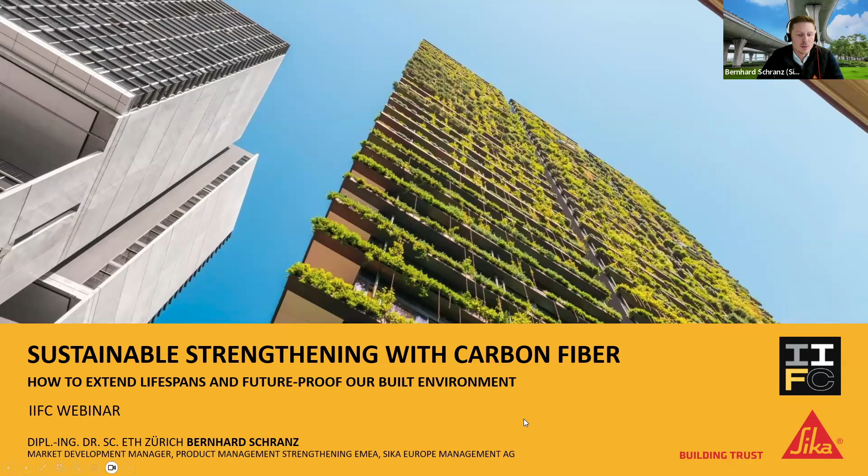I'm a structural engineer by training as well. I did my PhD in structural engineering in Zurich at EMPA and ETH in the field of structural strengthening. And I'm responsible at Sika for market development for infrastructure, Europe North, DACH, and Europe South, and also responsible for the product management of strengthening in the EMEA region.

Just very briefly, who we are. You might have heard of us as well. We're a multinational company in several business fields. We're 33,000 colleagues now in about 100 countries. We're producing in 400 factories, and we're quite proud that we have about 108 patents each year.

These are our business fields, and today we're going to talk about what we call engineered refurbishment. So we're talking about reducing CO2 impact of the built environment. And why is this important, or why is this becoming more of a pressing issue?

I'm sure everyone has their own answers for this as well, but here are some facts. Depending on the study that you read, most of them say something similar. About 20% of global CO2 emissions are caused actually by construction materials. And so we can track back 13% to the actual load-bearing structure. Most of the countries, including big corporates or small companies, have pledged to net zero by 2050. Then what makes everything more complicated is that 70%, when we talk about some of our biggest infrastructures, so bridges, 70% of those are already older than 50 years.

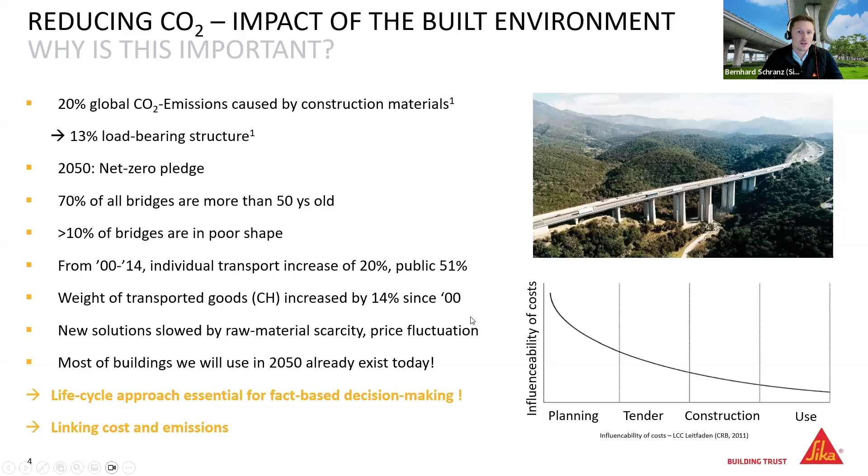Why is this especially important? Because considering this graph here, in the very, very early project phases, you can still influence your costs. But then when it comes to more concrete phases, or even the use, then you're stuck with all the costs that your structure, let's say, produces every year. And you can't influence it enough. So an early long-term view is very important.

So what are current strategies? Well, I've identified mainly three, which are: increase the lifespan of structures to reduce the CO2 impact, which can be done, of course, including the carbon fiber products that you're about to see; protect the structure against environmental influence, what we call the SikaGard range; and effective repair material uses for all circumstances, we call MonoTop.

Then using high performance materials at the right place instead of masses of low performance materials. They actually might have higher CO2 impact per kilogram, but when you check the whole structure and their effects of those materials, then you will find soon that this is very effective to reduce emissions. And this also includes high strength materials such as our ultra high performance concrete, the Sikacrete 920 UHP, it's called with us.

This graph here I found very interesting. It was conducted during a study at EPFL in Lausanne in Switzerland. So you basically have here the global warming potential in kilogram CO2 equivalent, and here the service duration. This is a bridge deck repair, let's say.

So in the beginning, you can do the bridge deck repair with standard concrete in black, or let's look at the green dashed line, with ultra high performance concrete. And you see they have a similar, or let's say the ultra high performance concrete has a higher CO2 impact in the beginning, but then every year when you have to replace the less performant material, the concrete, you increase the CO2 impact. And of course you can replace the y-axis here with cost as well, while the ultra high performance concrete stays virtually the same. So that means you might have higher CO2 impact maybe in the beginning, and cost, but in the long-term view, you will have much lower of both.

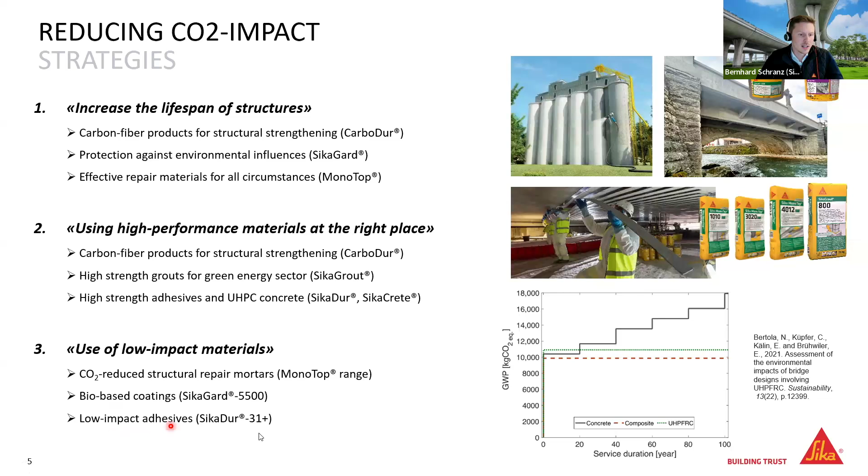Life cycle analysis in terms of cost and emissions is important, but how often is it really used at the moment? We conducted this study in Switzerland and found that in 9% of all construction projects we investigated, life cycle emissions were actually investigated. The unanswered responses we are almost certain are also a no, so in most cases they are not even looking at emissions in a life cycle approach.

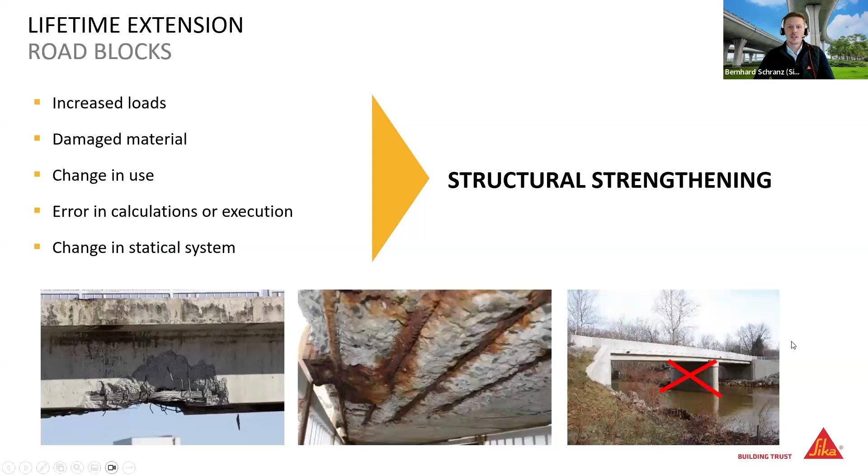Some more roadblocks you encounter with aging infrastructure: loads are increasing, you have damaged and deteriorated materials, changes in use, and oftentimes errors in calculations or execution, or changes to the statical system, like wanting to remove a center support. All this leads to structural strengthening being essential for lifetime extension.

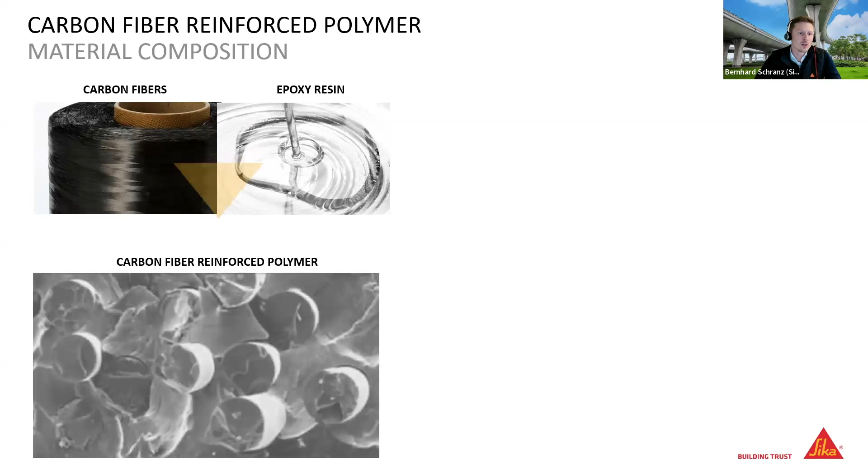Let's have a look at the solutions currently in the market. We believe carbon fiber is a highly effective solution. Basically, it's carbon fibers embedded in an epoxy matrix, which gives you carbon fiber reinforced polymer, CFRP. When you compare the carbon fibers to a hair, carbon fiber is much smaller, so in each CFRP plate you have thousands of those fibers.

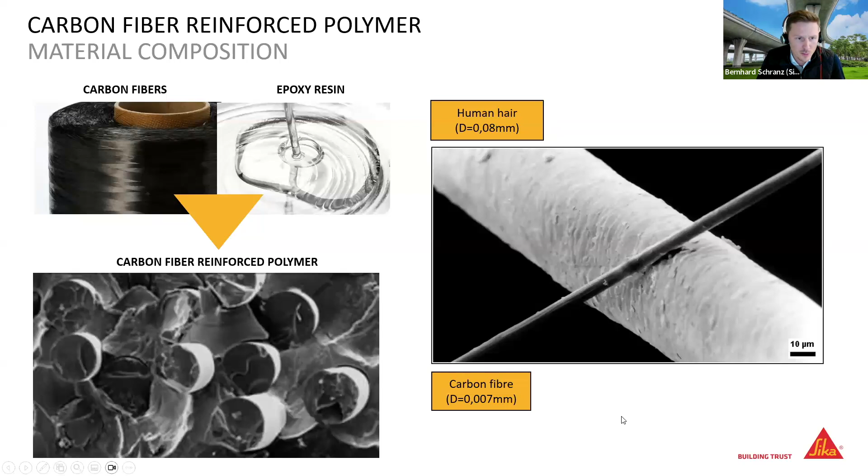You might know this material from different industries like high performance sports, motorsports, or even the aviation industry. We were among the first ones who brought this together with EMPA to the construction market. Material prices decreased, and with a lot of testing in the 80s, this eventually led to the first products and the first site applications.

The very first application was in 1991 on a pre-stressed concrete bridge. I recently checked, and the strips are still there. Also in 1992, it was used on a historical timber bridge. Here you can see what our commercials back then looked like.

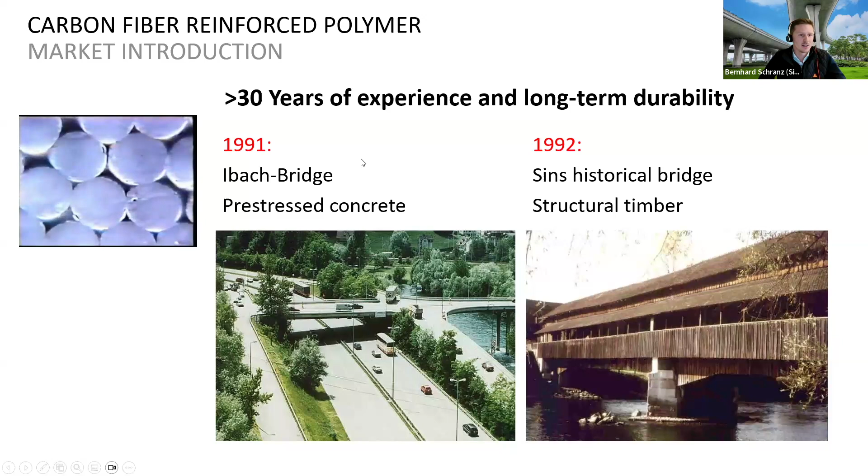So why do we trust in carbon fiber? At the moment it's already widely adopted in all sorts of international standards, which is a sign from the standardization side of wide adoption. It has very high tensile strength, it does not corrode so it's highly durable, you can roll it up to lengths of about 200 meters, and in the end you get very small cross sections for strengthening.

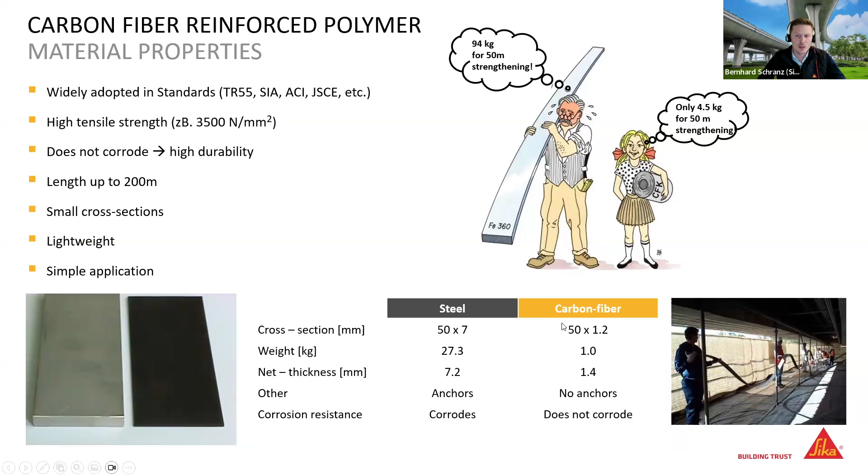It's very lightweight and also very simple. If you compare, for instance, the equivalent steel to carbon fiber, it's several times smaller if you make a strengthening solution with carbon fiber.

Going through the standard solutions available at the moment: what you will usually use is CFRP plates that come on a roll. These are fabricated in the factory, and you have all sorts of stiffnesses usually available and different cross sections as well, which you define depending on the load and surface needs that you have.

Usually you bond them externally, like you see here on that bridge, or you can also have them in a near surface mounted configuration, where you have a smaller cross section that you embed in a groove.

What you can also do is pre-stress them. In some cases with very high demands, you can post-tension them, which also increases serviceability considerably and lets you utilize the material even higher. They're usually glued to the surface with an epoxy resin, which we call Sikadur 30.

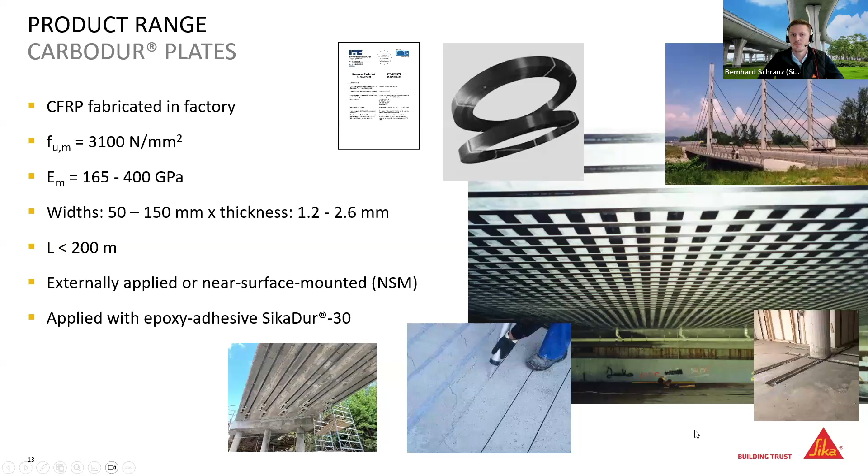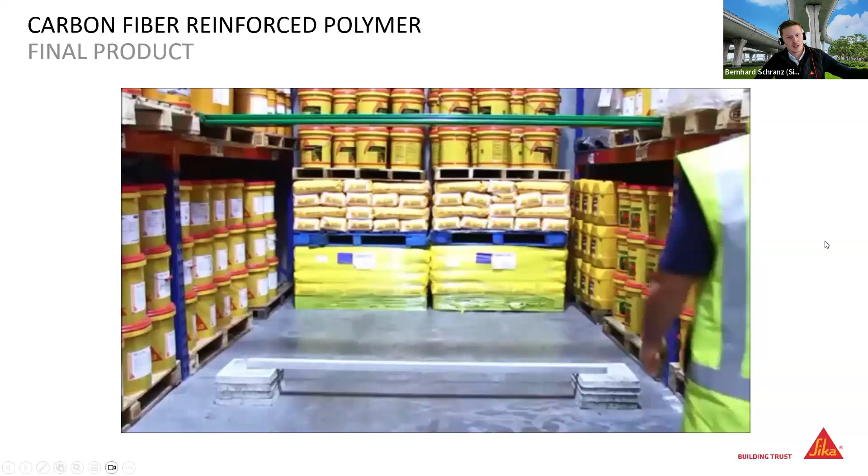So here it's not a very scientific test, but very nice to look at. We had two concrete beams, one unreinforced and one reinforced with a carbon fiber strip, and then both beams were loaded. This is the unreinforced beam, and as expected, it cracked and immediately failed.

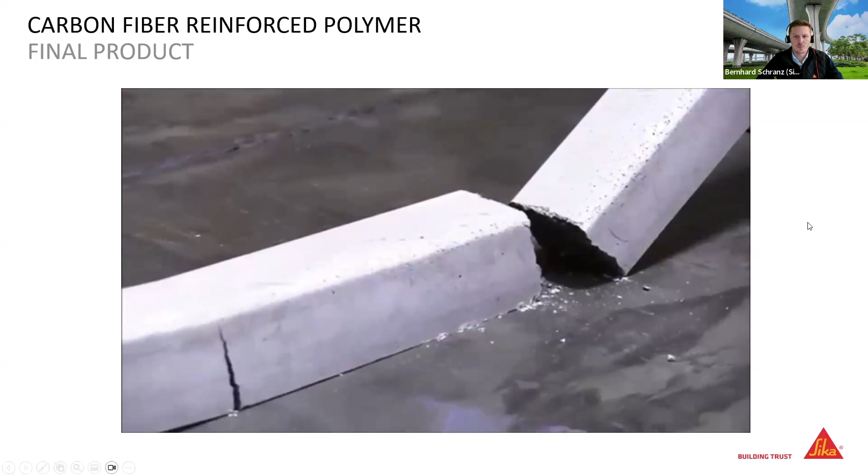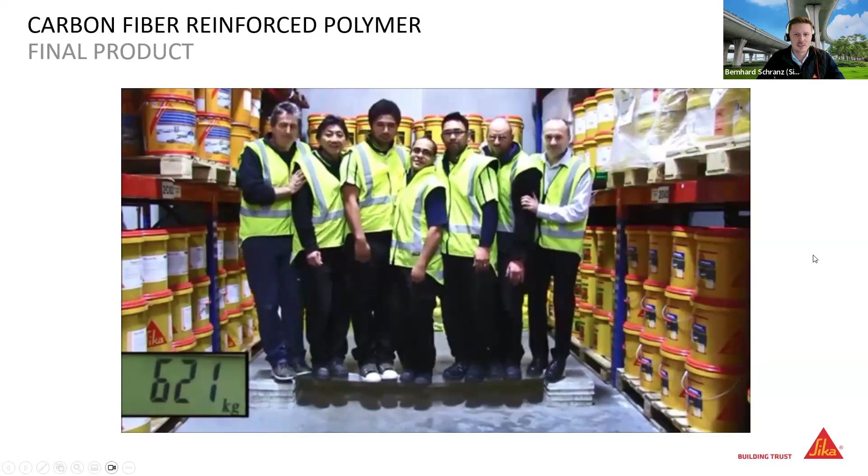Then we tested the strengthened beam, and it did not only hold the first load, but also even more loads. We had a lot of colleagues coming from the offices to stand on the new beam. And it's not only static loading, but we had them do a little bit of sports, dynamically loading this little beam. So it's a nice demonstration of how the material increases the structural performance.

Then next to the plates, we also have the fabrics, and the fabrics are usually CFRP. The reinforced polymer is created on site. That means you take the fibers as a sheet, apply them together with epoxy onto the structure, and then the CFRP is created.

Material parameters are a little bit different, also the stiffness - you will find all this info in the data sheet. Usually we have widths of 300 to 600 millimeters, and these are usually the roll lengths.

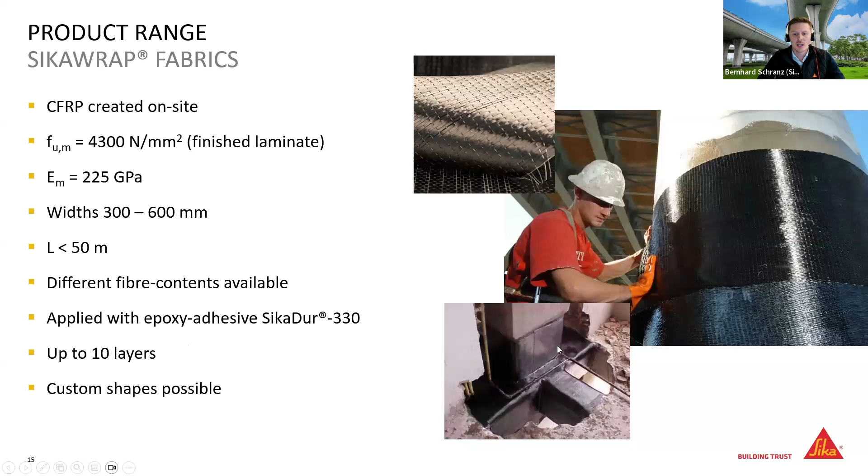We also have different fiber contents depending on the structural needs and the loading. This is the epoxy that you need with this material - it's a little bit less filled, or lower viscosity, so it nicely penetrates through the mesh. Up to 10 layers, depending on the structural applications, can be used, and of course custom shapes are also possible.

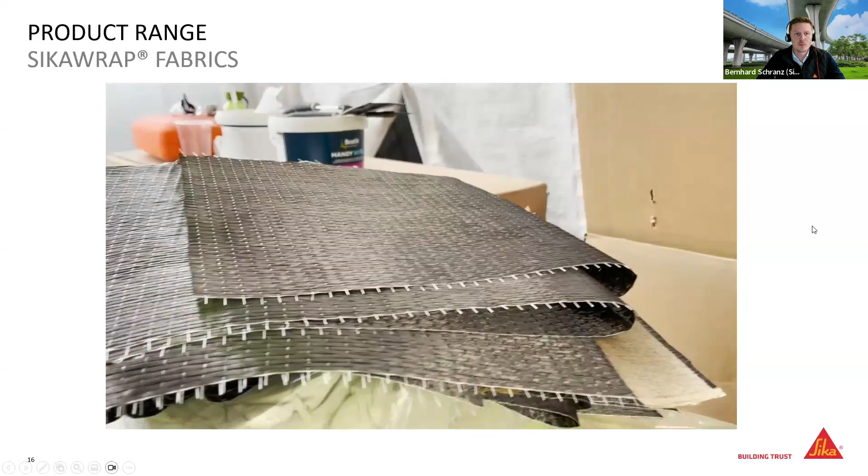This was a nice site example from Sweden. It was an old train repair shop, near demolition as you could imagine. Then the whole roof was strengthened with fabrics. Quite the effort, but in the end they could maintain the structure, so you could imagine the CO2 impact that was avoided against the option that the whole building would have been newly built.

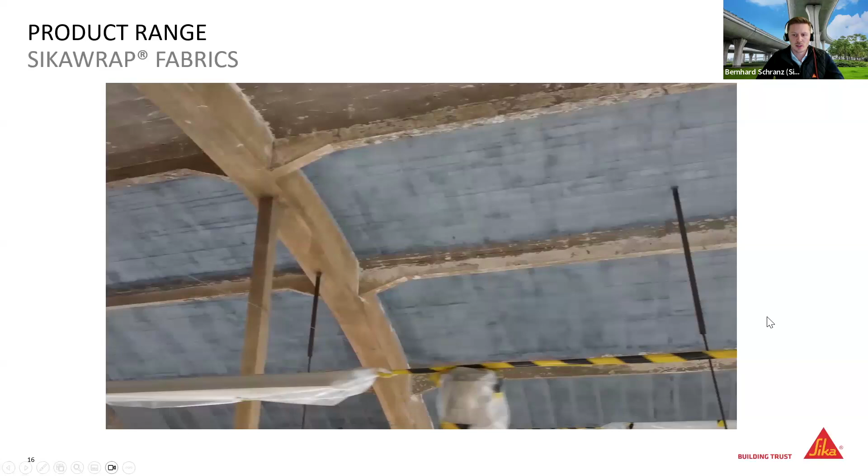What else is there? We also have prefabricated angles, post-installed anchors, and stirrups, in case you have less shear capacity.

And what we've been using for a long time is what we call the FX50. It's a carbon fiber strand that you can use for force transfer between all sorts of elements. When you cannot have the rigidity of the angles, plates, or fabrics, you can use this strand to create anchors, for instance under the CFRP angles or under the fabrics, to really put the forces into the compressive zone, or close the shear strengthening on top.

As you can see here, this was actually a shear strengthening done only with this material.

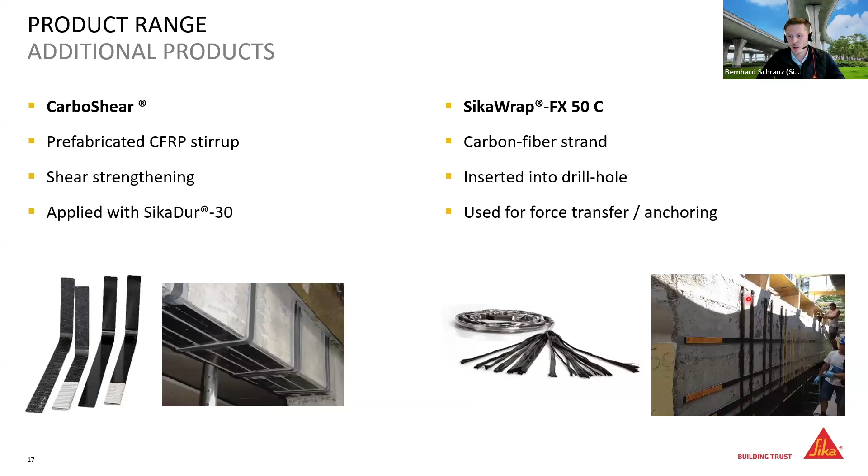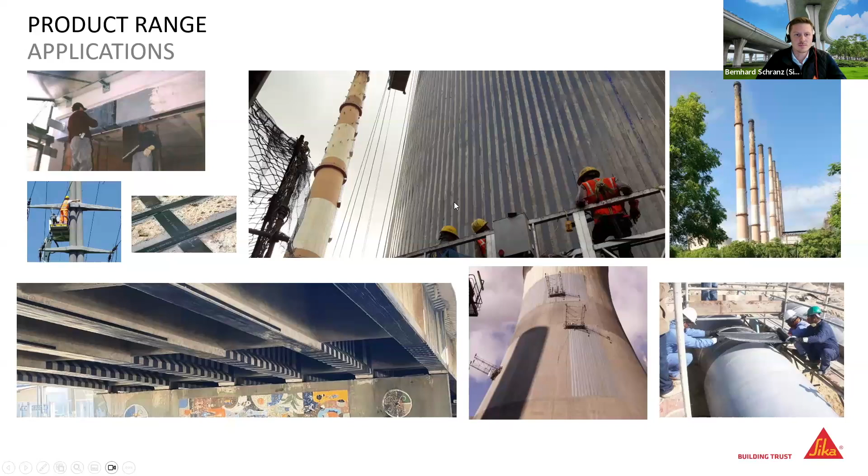Some further applications: standard shear strengthening, crossings of plates, very impressive applications on cooling towers and chimneys. And since we're also active in the Middle East, this was a pipeline strengthening - so all sorts of applications are possible.

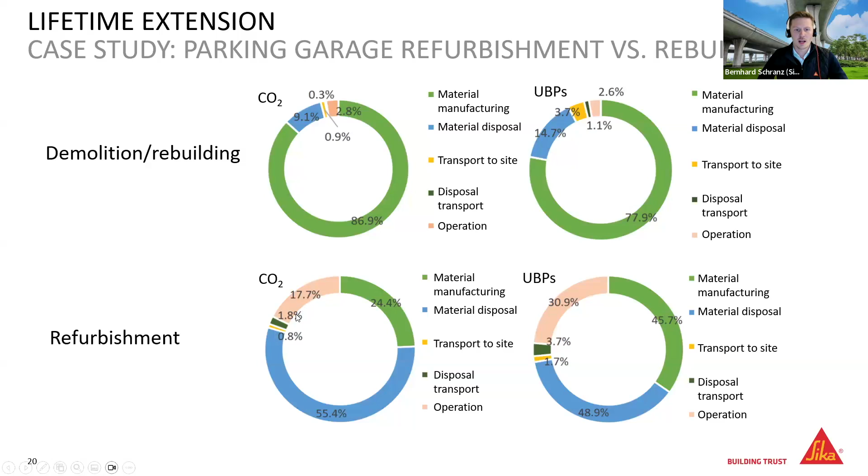When you go to refurbishment, it looks a bit different because you use a lot less material. The material disposal becomes more significant because you also dispose of the entire building at the end, and then the operational phase gets more important.

When we now look at total emissions and total cost, you see that rebuilding has much, much higher CO2 impact than refurbishment. And also what was interesting in terms of cost, the refurbishment was the better option.

Because most building owners, when you completely refurbish a building, like the city of Zurich, you can assign the initial lifetime to a totally refurbished building, and this is why refurbishment has a much nicer, much better cost footprint, let's say.

And this is even without considering operational hindrance cost. It means when they have to demolish the complete parking garage and they don't have any revenue from that for years, in comparison to when you have an intelligent refurbishment concept and can keep some of the structure still in operation. This comes on top, so the delta between those two will be much bigger.

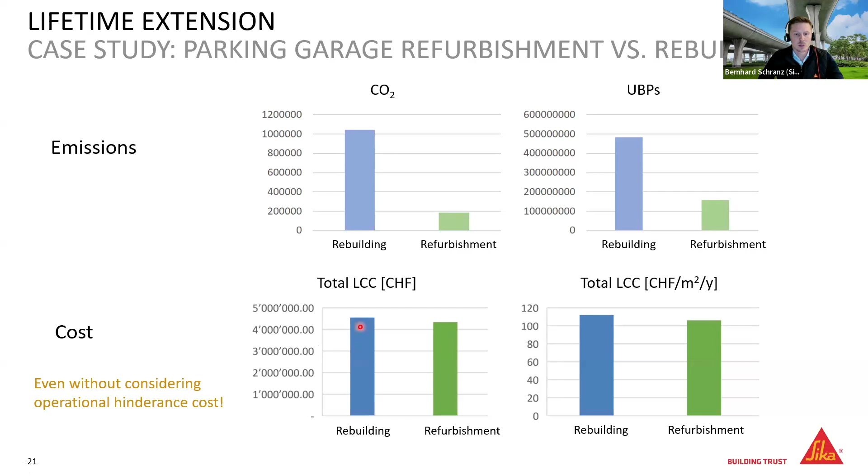So then we thought, okay, how about our materials? Can they actually last so long? Because we were involved from the beginning, we found very old projects where some of the materials were used. Here you see a road bridge, Oberriet-Meiningen, between Austria and Switzerland, where it was strengthened in 1996, and last year EMPA took some photos. Thank you very much to our colleague Safiris at EMPA. And the Carbodur really, the CFRP really works - this was based on visual inspection, of course.

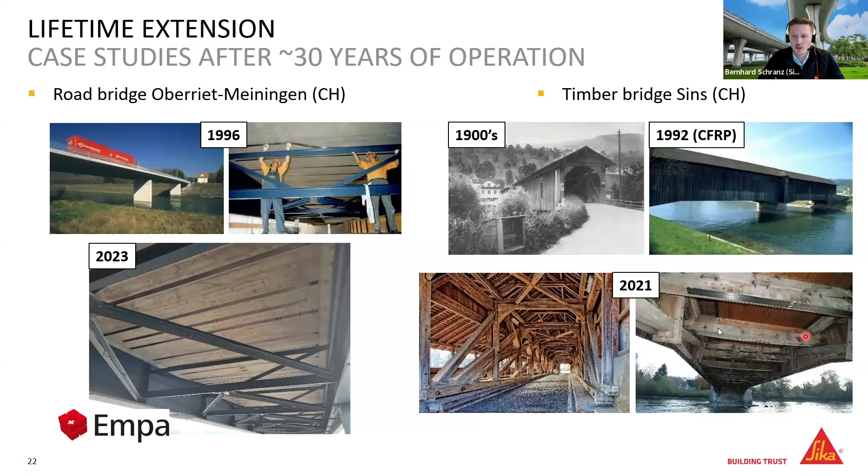We're currently working on also finding out the real material properties. And then here you have the timber bridge Sins from the beginning, which is actually very, very old, much older than the 1900s. But it was strengthened in 1992, and here also the CFRP strips really look great.

So what are the key takeaways from this? The pressure for lifetime extension is really increasing due to several external factors. Life cycle approach is essential, but it's not widely adopted still. Refurbishment can really have lower cost and emissions than complete demolition and rebuilding.

Decreasing maintenance cycles decrease emissions and cost, and this has to be checked for which materials are really used there. Please use highly durable, high performance materials because it will have a big effect on the life cycle performance. Also use CO2 reduced materials if you have to use a lot of them. And of course, use CFRP materials to enable sustainable lifetime extension.

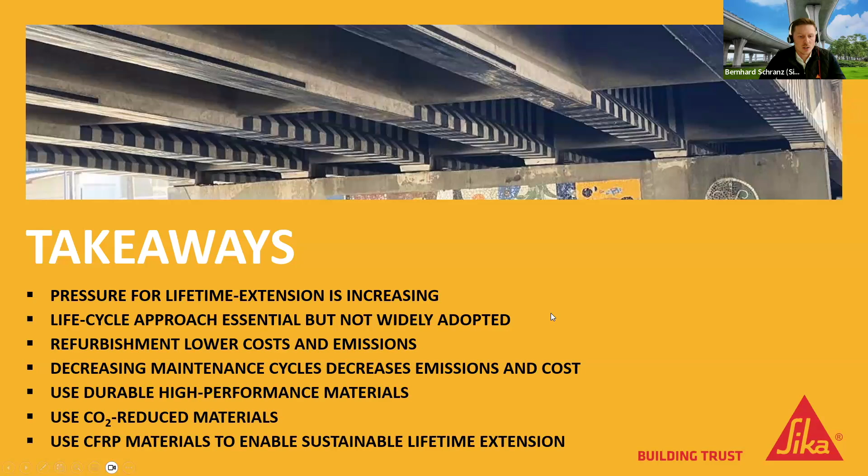And with that, I would like to thank you very much for your attention and hand over to my colleague Antonino Montalbano. I think Senna will do the questions afterwards, or? Yes, it's better at the end of all the presentations. Oh, okay, thank you, Bernhard.

I will take over. Just please confirm that you can see my screen. Yes. Yes. Okay. So my name is Antonino Montalbano. I'm a structural engineer, I'm from Italy, and currently I'm in charge, I'm responsible for the structural strengthening solutions for the SIKA group.

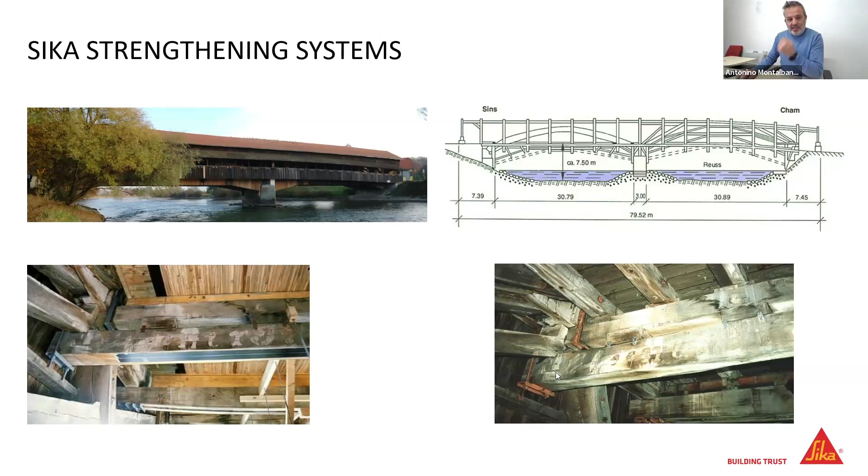I will go very fast with the first slides because Bernhard already showed you something about and mentioned the Sins bridge - it is one of the first ever applications in SIKA, and I will go fast also on this because Bernhard showed what is our current product range that covers all the needs with several products and solutions. I would add something related to some special applications that can be useful and can help find a suitable solution in some conditions where the classic FRP systems cannot be used.

I'm referring to what internationally is called FRCM systems, or sometimes TRM systems. So basically, all the systems that Bernhard, in the presentation before me, showed are FRP, where FRP stands for fiber reinforced polymer, and are composite systems that use as a matrix an organic matrix, normally epoxy based.

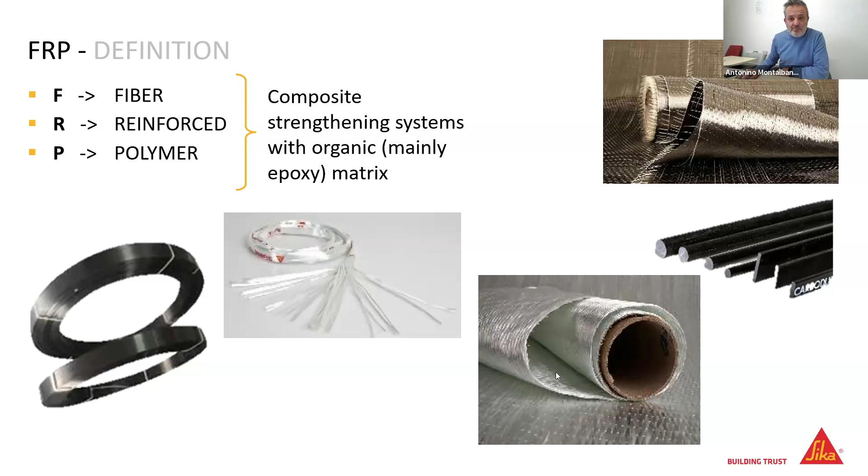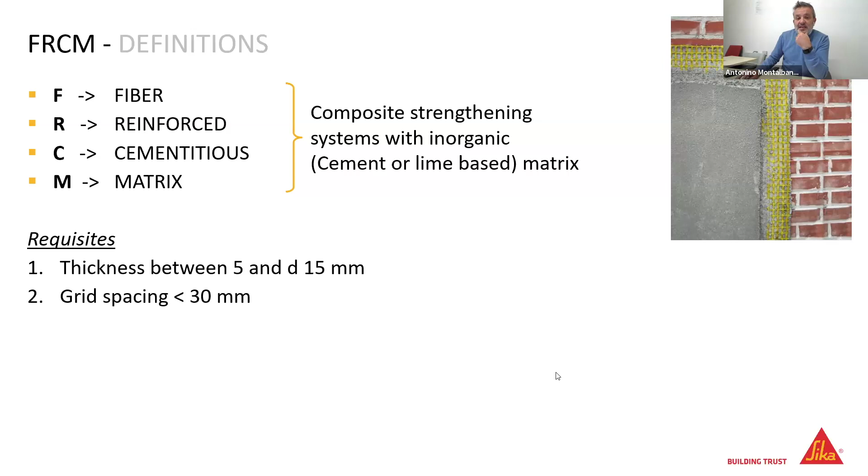I will give you a quick overview on the FRCM, where the concept is the same: a composite material, but instead of using an organic matrix, we use an inorganic matrix that can be cement or lime-based. The systems are thicker than classic FRP, with thickness between 5 and 15 millimeters, normally using glass fiber, carbon fiber, or sometimes basalt fibers with a spacing lower than 30 millimeters, so we use dense grids.

The advantage of these systems is that we need less surface preparation in terms of smoothness. We still need a clean, dust-free surface, but since we are using a slightly thicker system, we can have a less smooth surface and it will be okay.

One of the main advantages of this system is that, using an inorganic matrix, these systems can be applicable on humid substrates. So if you imagine a humid substrate, like when we work in a water tank or a buried structure, the application of classic FRP and epoxy resin is still possible, but needs special applications. These systems don't go in direct competition with classic FRP, but allow us to work in special application or service conditions.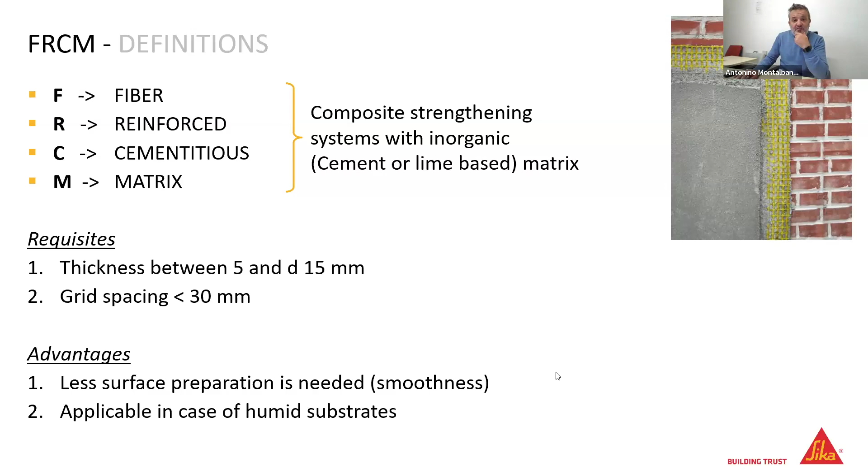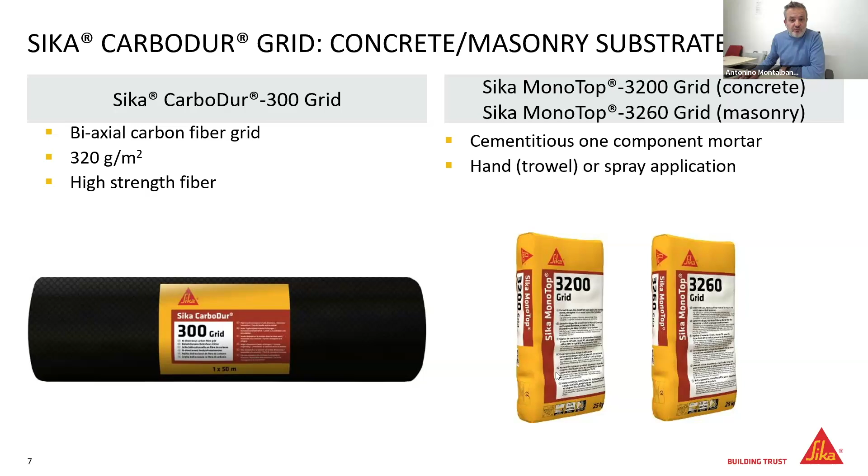I want to focus my presentation by quickly introducing one of our systems, called CarboDur Grid system. It's an FRCM system that uses a biaxial balanced carbon fiber grid. We have two different cementitious matrices that can be used: one mainly for concrete substrate, the MonoTop 3200, and one mainly for masonry substrates, the 3260 grid mortar.

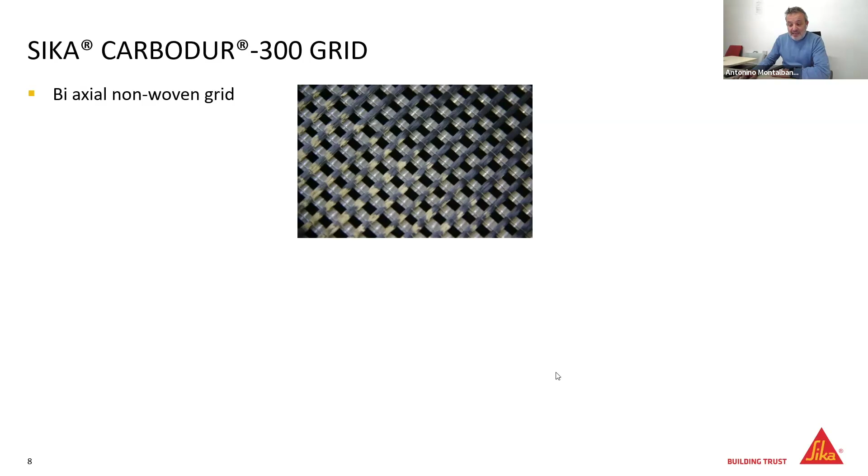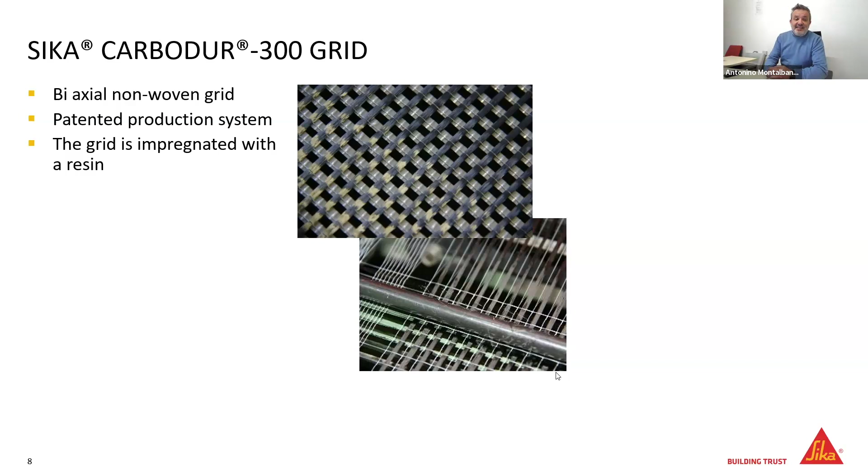The grid is quite special: it's a biaxial non-woven grid, meaning both the warp and the weft are plain without any weaving. The production system is patented, and it's not a dry fiber - the grid is impregnated with an acrylic-based resin, which dramatically improves adhesion with the mortar. Thanks to this impregnation, the grid is stable, easy to handle, and to apply.

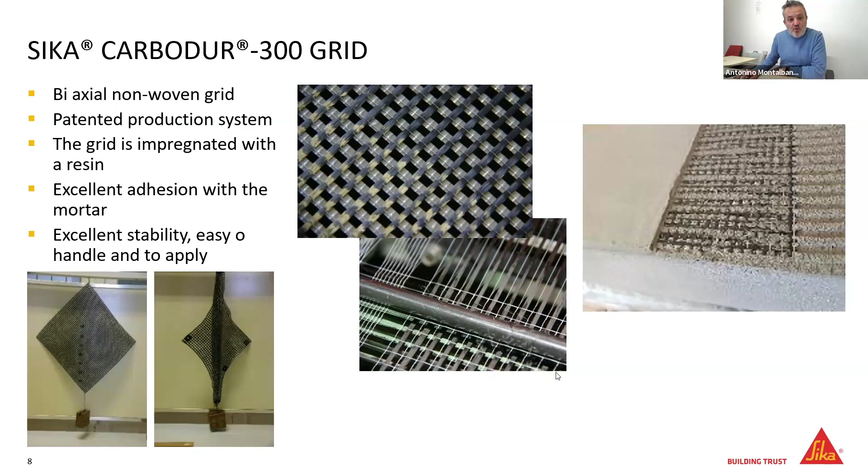In the pictures on the bottom left of the slide, you can see a weight on a grid. On the left, the carbon grid; on the right, a classic carbon fiber grid with dry fibers. We will see in an application shortly how easy it is to handle and embed the grid in the mortar.

The main fields of use are masonry or concrete in buried structures, where the possibility to work with humid substrate reduces disruption time and allows us to work directly on it. The main uses are in wastewater, freshwater, and sewage structures, or in terms of infrastructure, typically in cooling towers and chimneys.

It can also be used normally for masonry and heritage structures, where classic FRP use is possible, but sometimes in this type of structure - we'll see an application shortly - we need a diffused strengthening system that covers the whole surface. In this case, most of the time we prefer to use FRCM systems instead of classic FRP.

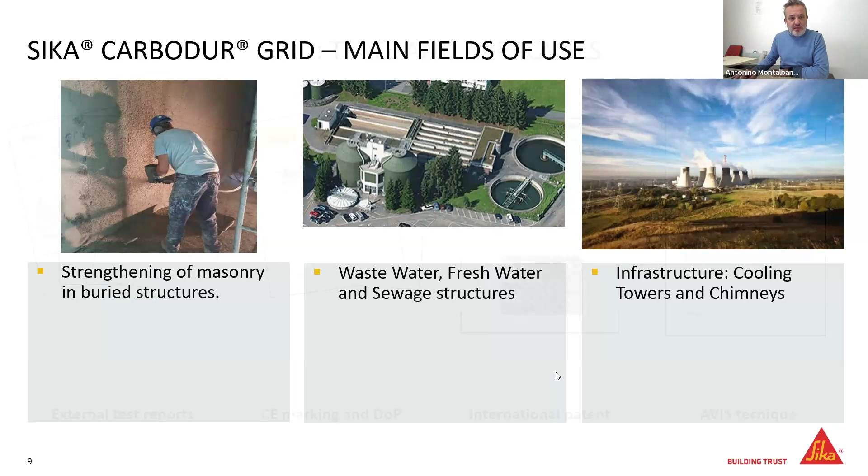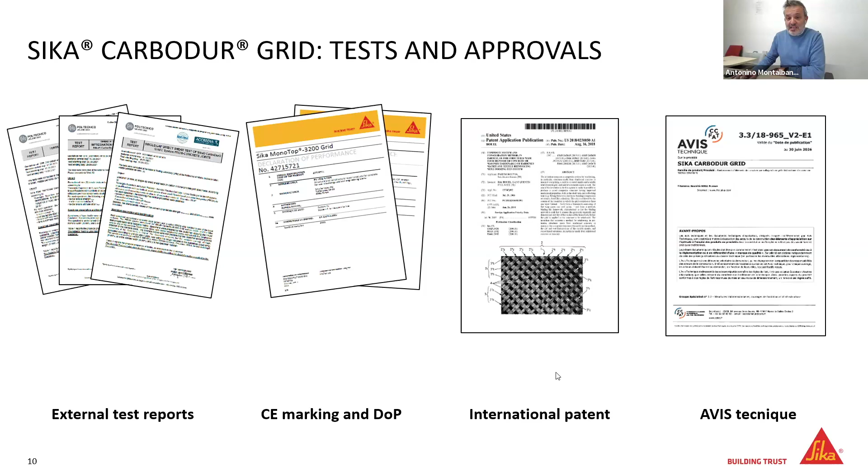For this system, we have a lot of external test reports. The mortars we use are CE marked, and we have international patent for the grid. For France, we have local approval for use as a structural system - we have the Avis Technique issued by the CSTB. The system is fully tested.

For the first one, this is - we are in Florence, in Italy.

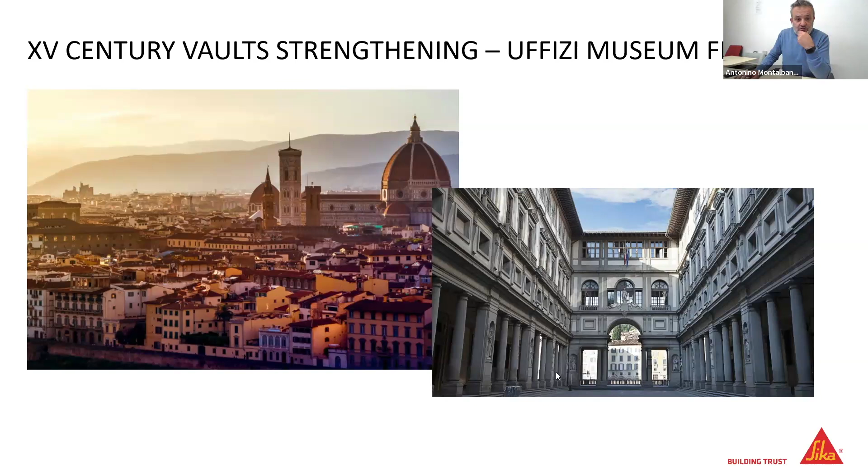You know that in Italy we have the main Renaissance museum in the world, the Uffizi Museum. During the years we applied several strengthening systems on this structure that was built in the 15th century, so 600 years ago. Apologies for the quality of the pictures, but these are screenshots from a video we did during the application.

This is, if you go to Florence, the new entrance of the museum where the ticket desks are. When they decided to change the destination of this room to the ticket desk, they needed to increase the loads on these vaults. This is a big vault because the side is 10 meters, so it's 4 vaults combined with a column in the center on the lower floor.

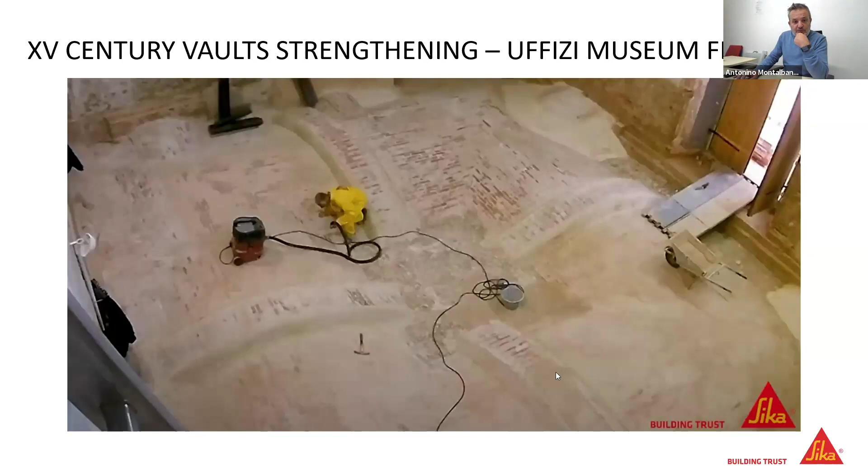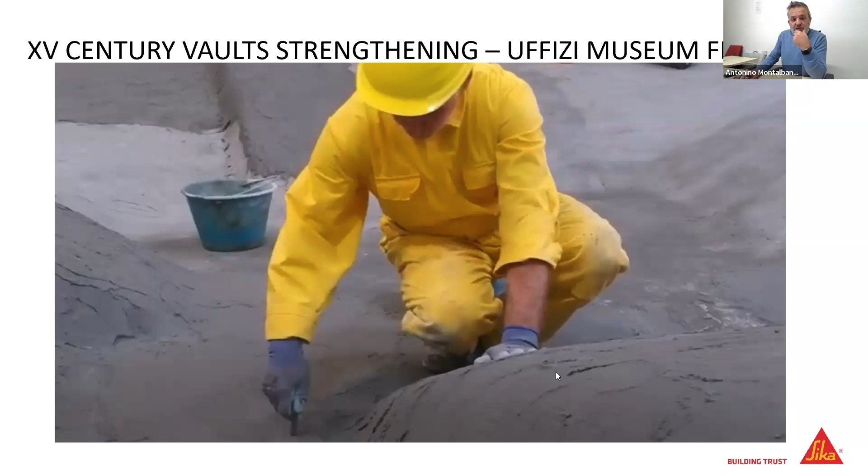In this case, we applied a glass fiber grid that we embedded in an inorganic matrix. You can see the phase of application where the total thickness of the system is around 10-12 millimeters, and we embed this grid to strengthen and improve the load-bearing capacity of these vaults.

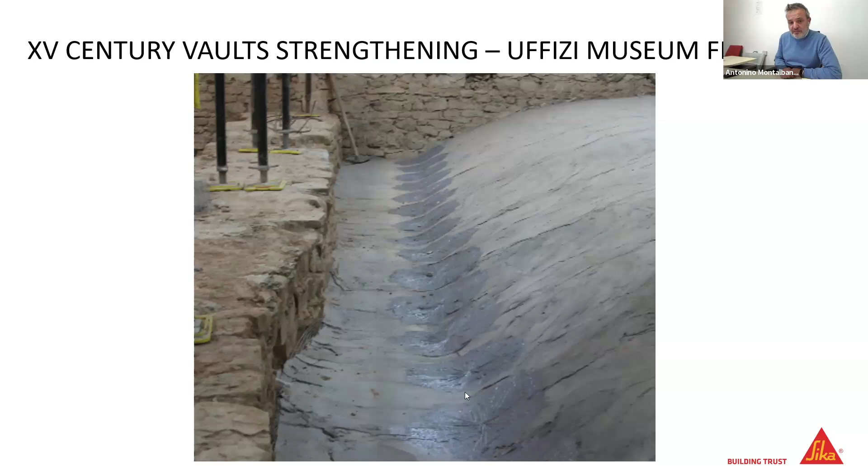These are other vaults also in the museum where we applied the same system on the vault, but additionally we applied, as you can see in this part, some glass fiber connectors to improve the adhesion and the mechanical performance of the system on the sides of the vault.

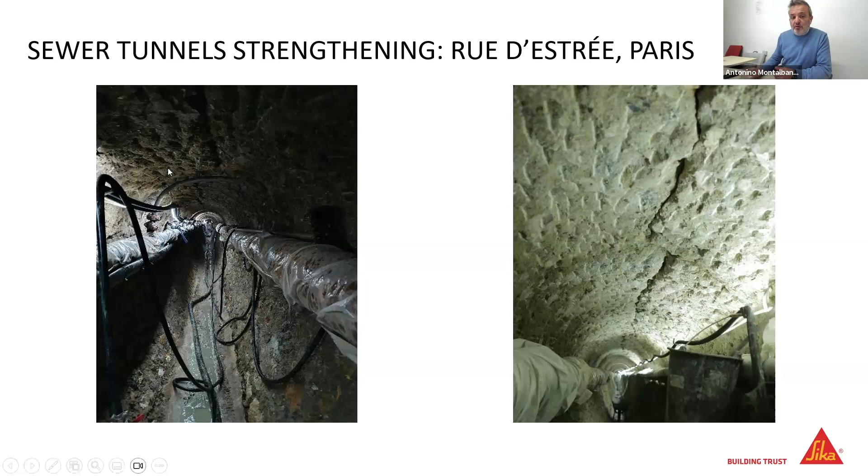In this case, it's a humid substrate, so the application of the FRP was not possible, and even the roughness of the surface was not suitable for FRP, so we applied the Sika CarboDur Grid system.

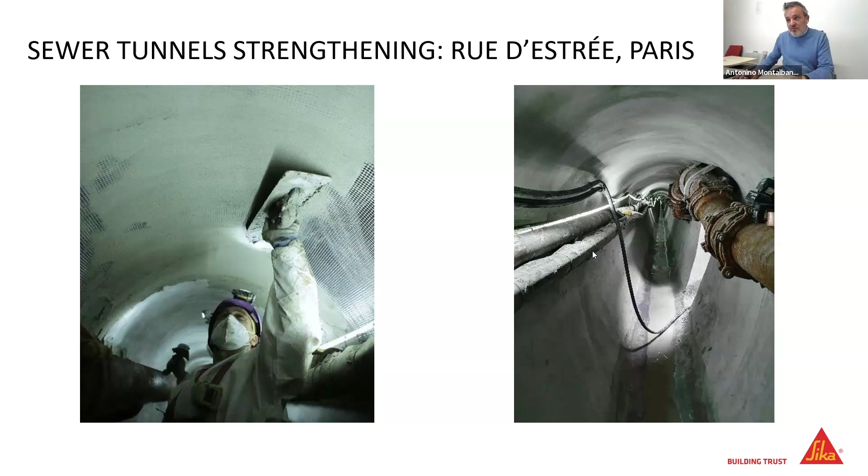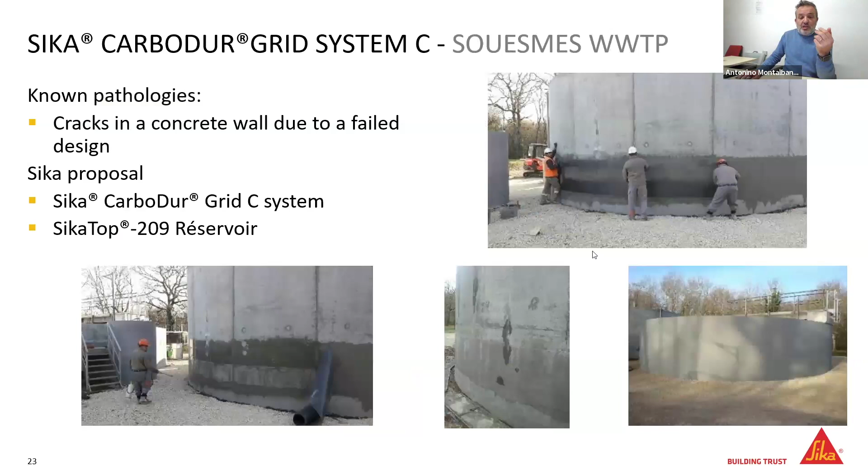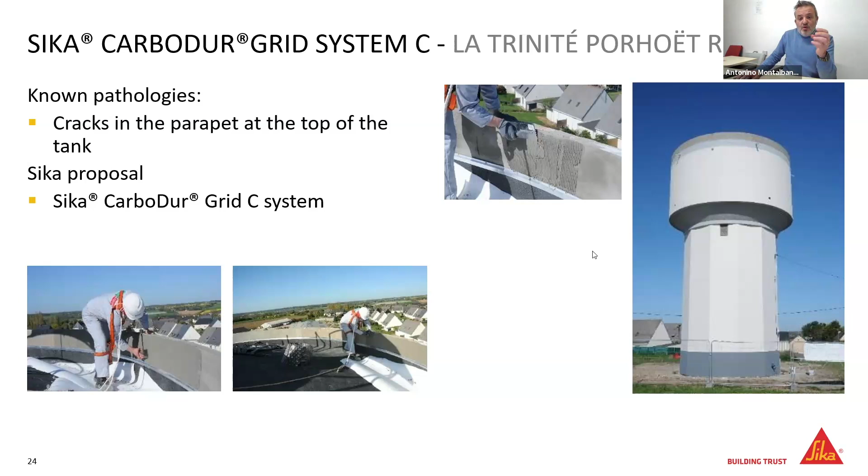There are several other typical applications, but I will fly through them quickly. We're talking about aqueducts, water tanks in wastewater treatment plants, and reservoirs of drinking water, all of which were reinforced and strengthened using the CarboDur grid.

Just in the last 30 seconds, I want to mention that we have developed and give to our customers a software - basically two Excel spreadsheets, one especially designed for masonry structures, one for concrete. With masonry, we can design in-plane shear capacity of a masonry panel, in-plane or out-of-plane flexural behavior of a masonry panel, or confinement of a column. With the concrete software, we can do shear of a rectangular T-shaped beam, flexural of a rectangular T-shaped beam, or confinement of a concrete column.

For me it's okay, I wait for your questions, and I will be happy to answer if you have any. So thank you very much.

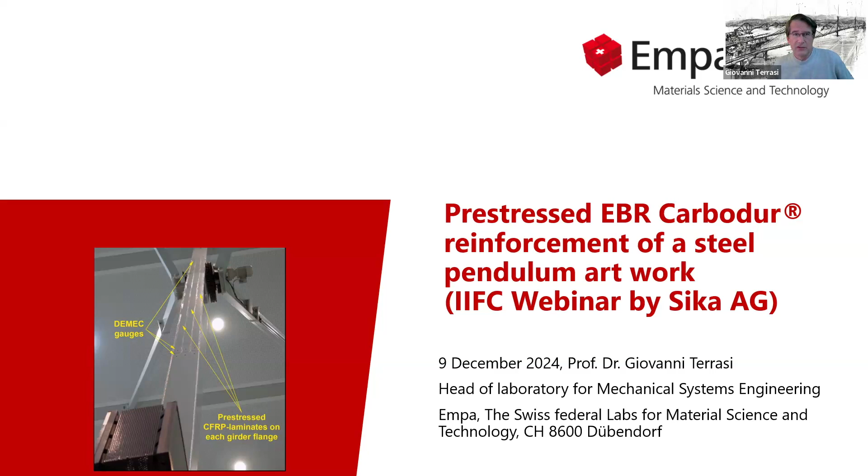That was the first slide. The next one would look at the box girder. It is a tapered 13 meters long welded steel box girder, made of a quite low-grade mild steel with a yield strength in the range of 250 megapascal approximately.

The original structure was carrying two oscillating TV monitors, each 80 kilograms in weight, showing the share value of this company, oscillating in the entrance hall of this reinsurance company with a period of oscillation of roughly 24 seconds. So this pendulum was doing something like 400,000 load cycles, or oscillation cycles, per year.

Originally, the sections, which were built by welding steel plates, were butt welded one to the other. In the center of the 13-meter pendulum, we have the electromechanical driving section, allowing the oscillation. The upper end has the equilibrating weight integrated in the tapered pendulum, while the lower weight is carrying the TV monitors. The original design was a butt welding of the box girder sections, and on top they were screwed with 12 HV screws each. So, a welding and screwing.

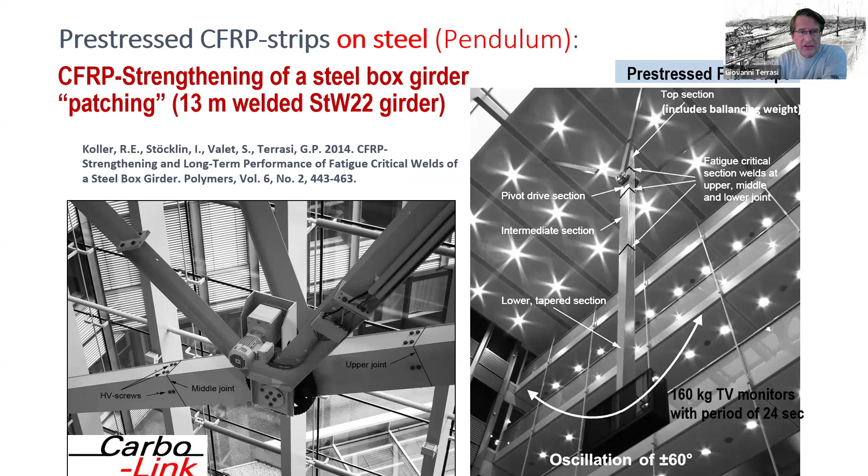But unfortunately, in the heat-affected zones of those welds, after 19 months of service, back in the year 2003, we had dramatic fatigue cracks, shown on the next slide. You see here the heat-affected zones, well known to be the weak links, the weak areas in fatigue for a welded steel girder.

Here we had dramatic cracks, and even the heads of single screws were falling down in the entrance hall. Not really good publicity for a reinsurance company, which then stopped the pendulum and asked EMPA for a refurbishment option. And here we teamed up with Carbolink.

Carbolink is a former EMPA spin-off company, founded in the year 2000 by one of my PhD colleagues, Dr. Andreas Winistorfer, together with Professor Urs Meier. So we were asked to propose strengthening solutions—of course a non-invasive strengthening solution, cost-effective, with an indiscernible impact.

And we came up with pre-stressed, externally bonded Carbodur CFRP pultruded plates, which were applied on the top and bottom flange, so tension and compression flange, over 6 meters, anchored in lowly fatigued areas.

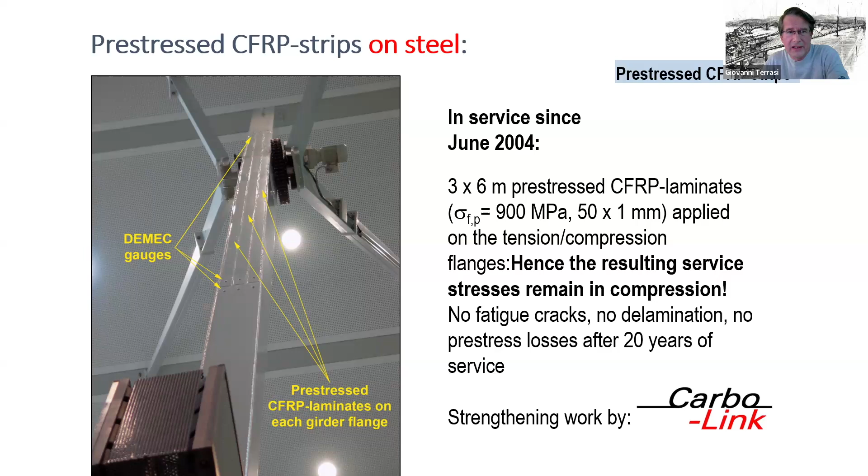So this I should say is a very durable solution, and my last slide sums it up. All pendulum welds in this case were renewed, and the tension and compression flanges were strengthened by 3 pre-stressed CFRP sheets, externally bonded and pre-stressed.

No pre-stress gradient was necessary here due to the high bond strength of the adhesive and the substrate for this particular case, and due to the fact that we anchored far away from the fatigued area. After 20 years of service and 8 million oscillations, our inspection showed no fatigue cracks, no pre-stress losses, and no delamination. So we could increase the fatigue life by a factor of at least 13.

And that was my short talk. Thank you very much for your attention, and for questions then in the question session.

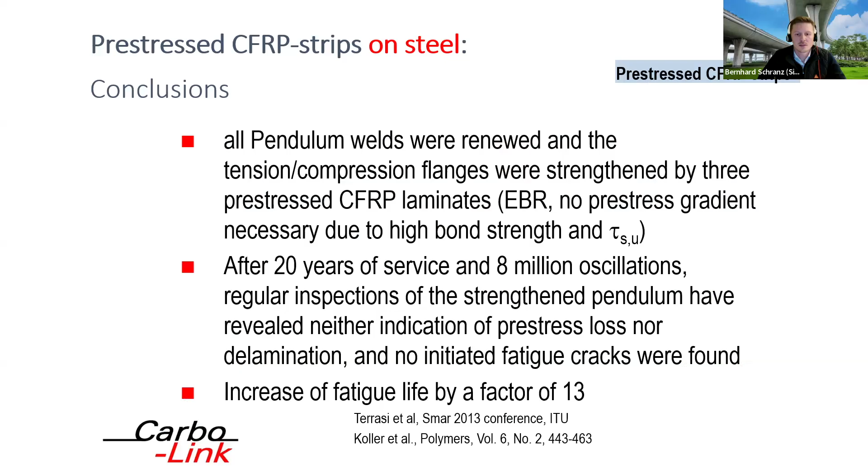Thank you, Bernhard. Thanks all for the invitation to give a small presentation of what you call large-scale site projects. My name is Christian Vodrazka. I'm from BAP Consult GmbH in Austria. I'm the CEO, that's my company. I've been working in this area for strengthening systems, mostly with carbon, for roughly 20 years now. I would like to show you some main projects I had done in the past, and go over to the first project.

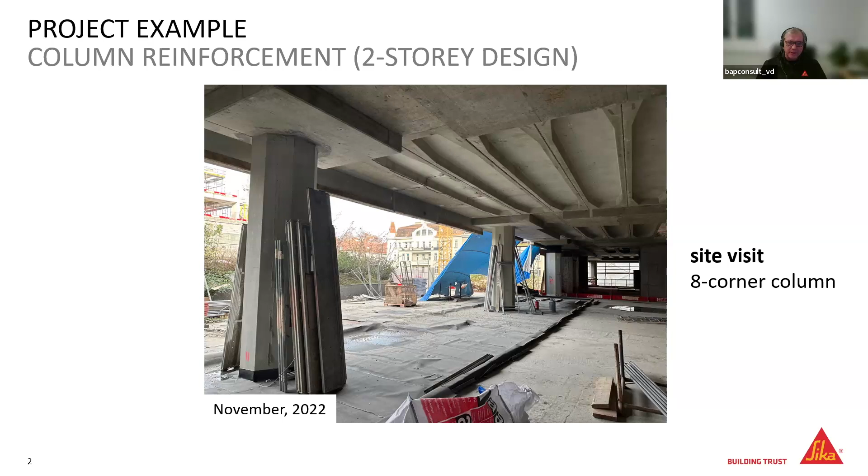This was a very nice project because it was a two-story design project. You see the first floor. This was surrounded with 8 corner columns, and the goal was to demolish the ceilings in the whole area, so it would come to the point that this will be a whole area, or a hall, in the future. This means 7.5 meters height, and to connect the two columns together with the FRP section.

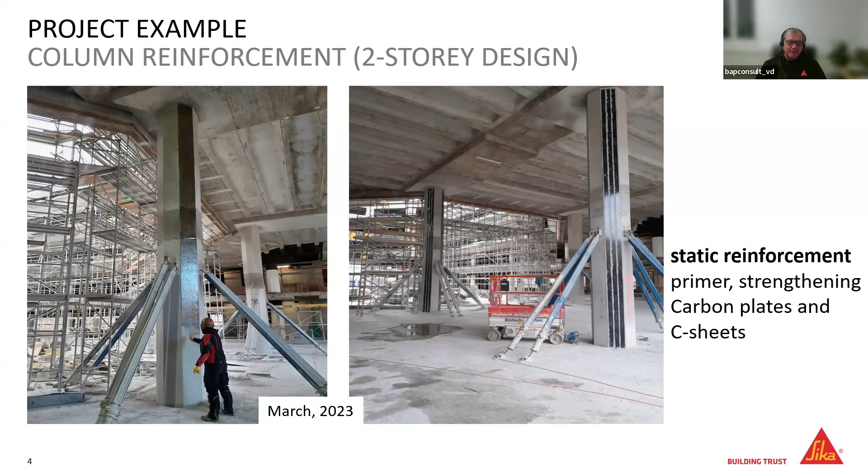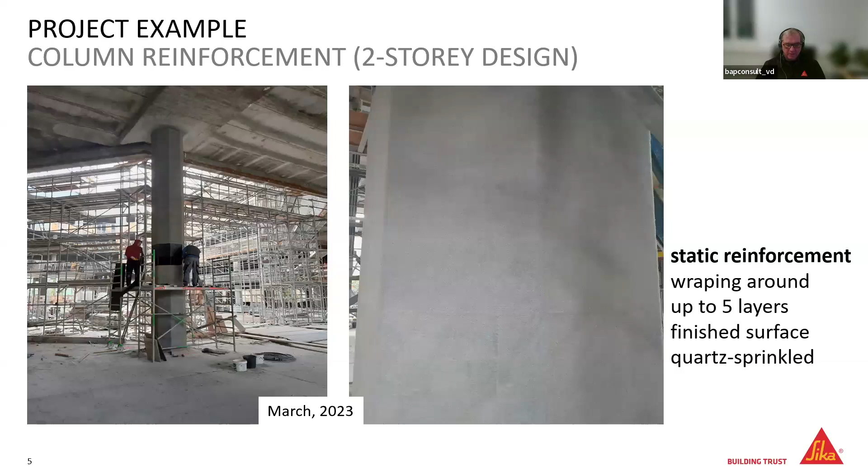The strengthening includes the carbon plates, we call it carbon plates, or we can say CFRP systems. The last thing was wrapping around with the C sheets. You see on the left picture, he's working very well because they are wrapping around. The work with the laminates is done. On the right picture you see the sprinkled surface. This is sprinkled, it is quartz sprinkled, because after this work they will protect it with a fire protection render or fire protection mortar. This was the preparing.

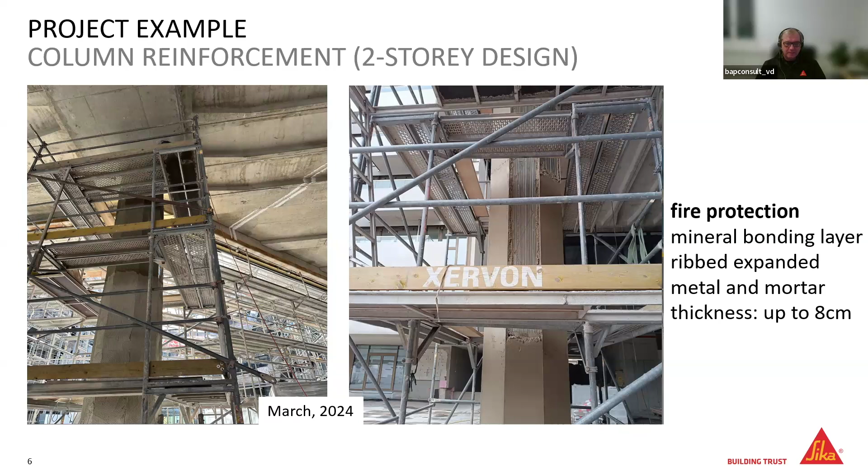After the preparing of the wrapping and the strengthening, now it comes to the fire protection system. The first thing was a mineral bonding layer, and of course afterwards we also need the metal mortar, the metal inside. It's called ribbed expanded metal. The thickness of the mortar, because of the incline of the column, was up to 8 centimeters. And the last picture is the finished product, a perfect surface.

This was a mineral filler, I think it was on a gips basis. So they have a really smooth surface because they want to show it, they don't want to paint it. This was actually the last picture of the column. This was a 2-story design building with the construction of the FRP. It worked very well, it was done in 2024, and I visited this site 2 or 3 times in 2024. They're all very satisfied with this project. This is one project to combine columns.

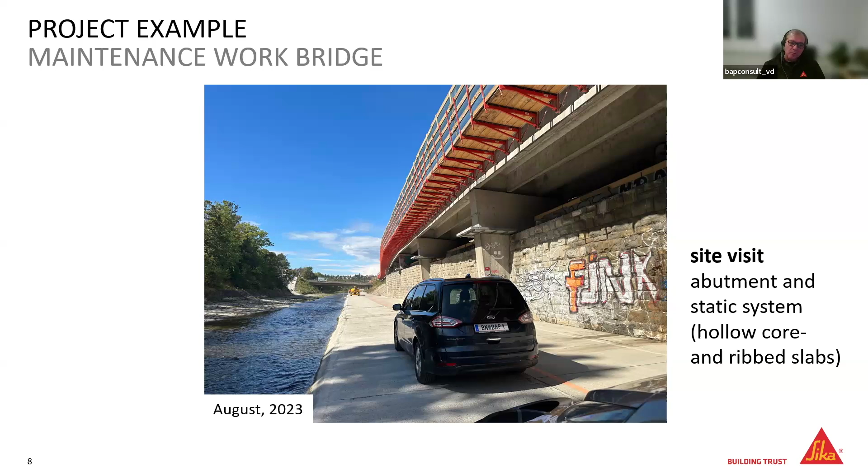So the next step, I think, is one of the biggest ones in Austria. It was a highway, or a street to the highway. You can see on the picture the abutment, and the static system included hollow core and ribbed slabs. This is actually my car, and this was on a channel, not a river, it's a small waterway in Austria. The problem was we always had to use the forklift, or we needed some scaffolding, also heavy things to put up the laminates.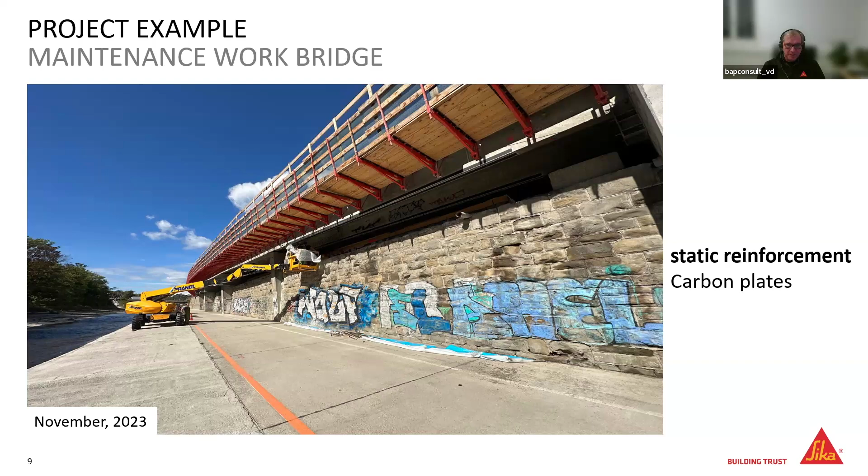Now you see it, now it's working. The carbon plates were applied on the beams, on the concrete beams. The first step was on the concrete beams. Then you see, but it was not so easy to apply the laminates because we used 3 forklifts. We needed these forklifts to bring the laminates up to the height, which was roughly 6 up to 9 meters.

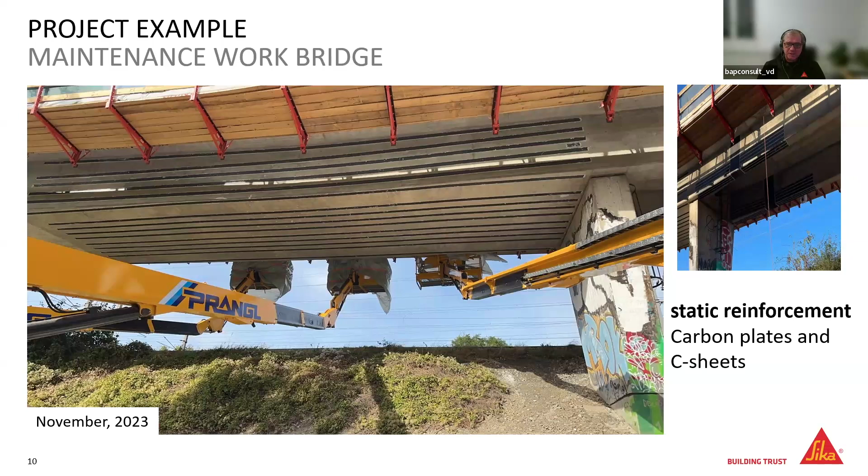And on the right picture you see afterwards we needed as well a carbon sheet. A carbon sheet was wrapped around, but not fully anchored. But this was enough because the height was 1.50 meters.

In 2024, exactly in February, we applied the carbon plates on the abutment. This was the last work we did for this main bridge in Austria.

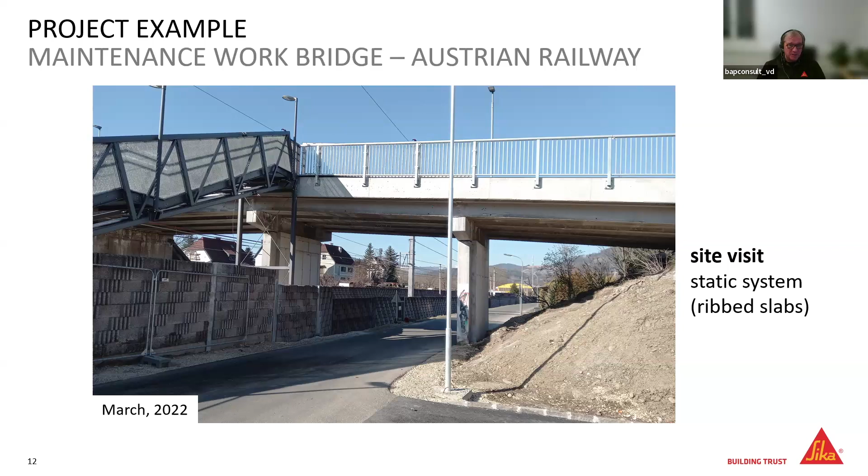Now, another smaller one, but also very interesting, because this was from the Austrian Railway. The problem was they have an exact time schedule. They can only close the railway, and in that time we had to prepare everything: the surface, the application, the reinforcement. I think it worked very well because it was done overnight. This was the time frame we got, it was 8 hours. The static system was ribbed. Yeah, this was the beginning.

We also used the CFRP, or the carbon plates, C-sheets, and maybe a little bit different to the FX50, I used the C-anchors. This is a carbon anchor for the C-sheet. This was work in progress.

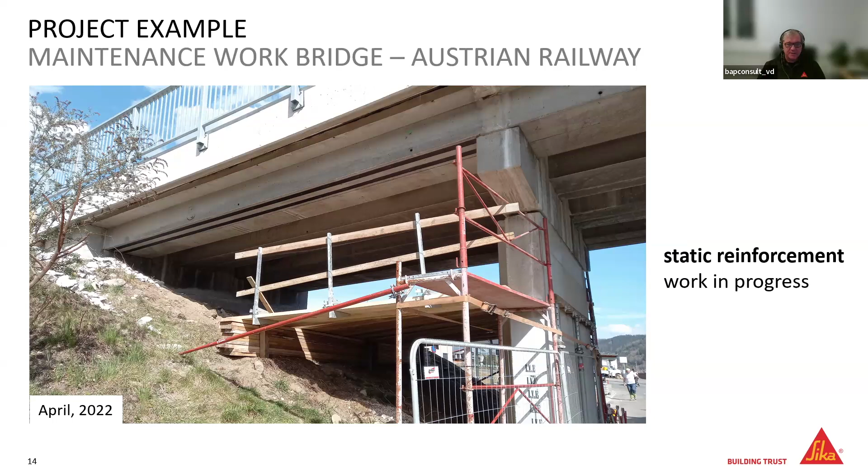On the right side, after the application of the C-sheet, we applied immediately the carbon anchor. The carbon anchor with the loose fibers on it spreads apart and is also glued on the C-sheet to pick up the forces in the pressure zone. On the left side, this is a typical device we used for the application of the laminates, a gluing system.

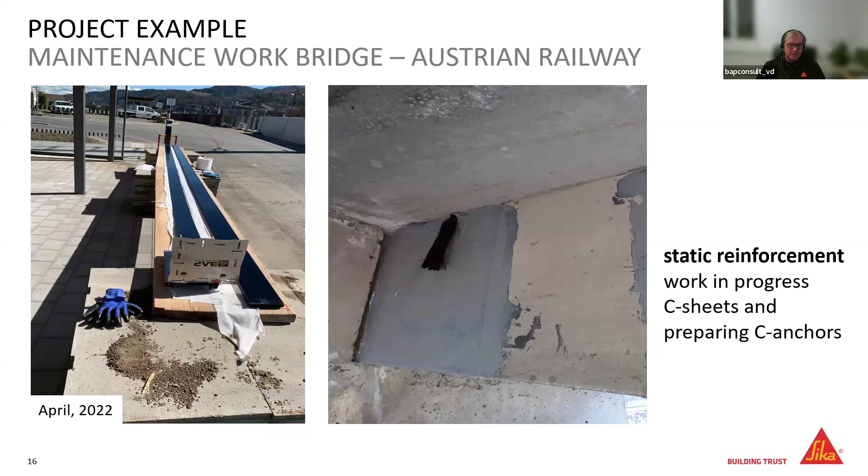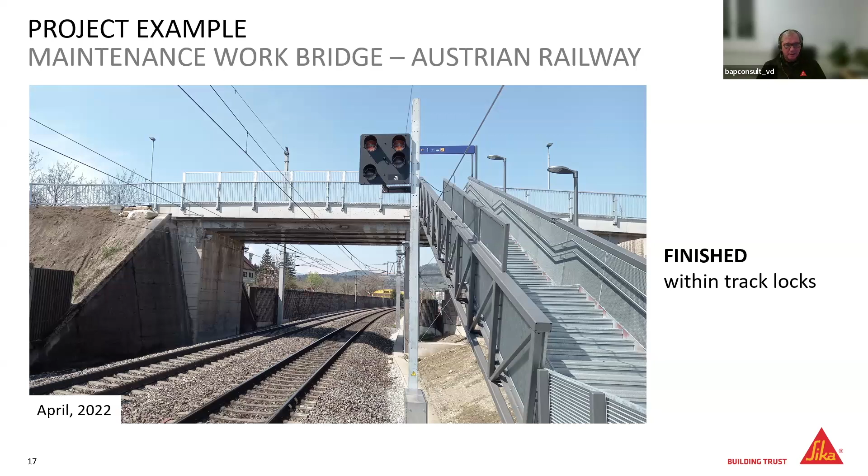Yeah, and this was the railway. This was the ribs that we applied under the railway. This was the finished look.

This was also a big project in Austria, directly in Vienna, the 9th district. It was the Medical Campus Vienna. It was a really big project. It started, and you see on the sides, Denkmalschutz.

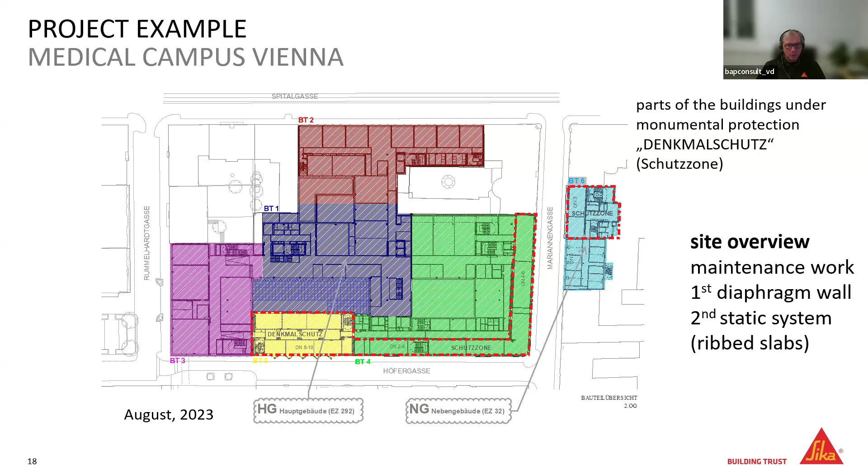That means monumental protection. It's not so easy to work on that because you really have to be careful with the demolition work, and of course also with the epoxy glue. The first step we did was the diaphragm wall. You see on the right side the diaphragm.

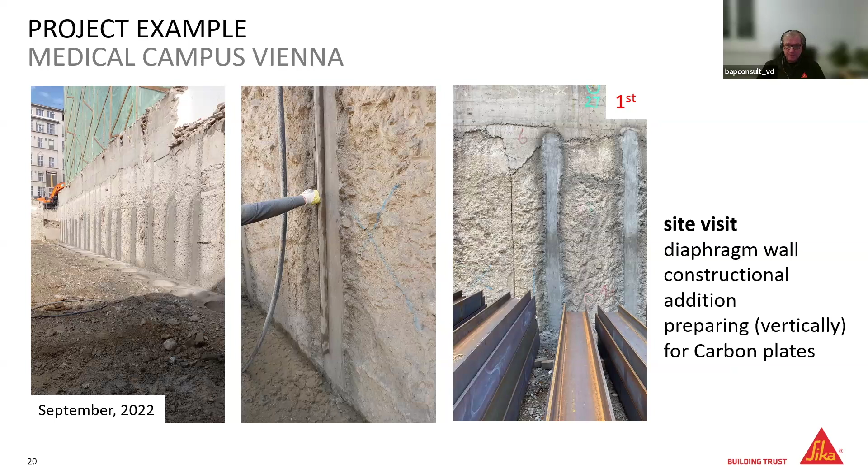It was not glued, sorry, it was leveled. Afterwards, after the leveling with a mortar, a normal mortar, R4 system, R4 mortar, we prepared this vertically. This was for a technical reason, they needed this. Then we applied the carbon plates.

Now you see the finished product. The carbon plates, I think it was 600 meters, then another 100 meters, so 700 meters all in all. Maybe interesting for you to look at, it was the reference shown in the bottom picture. The reference was done on the mortar, because for this you need 1.5 megapascal. This was the so-called reference piece.

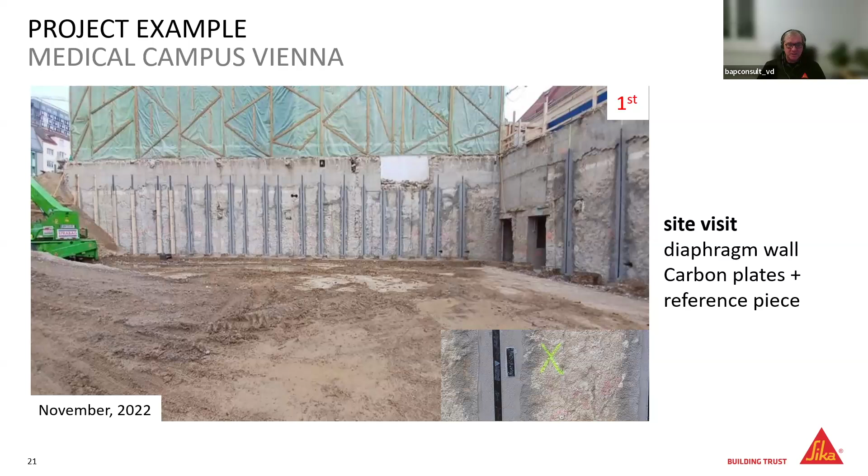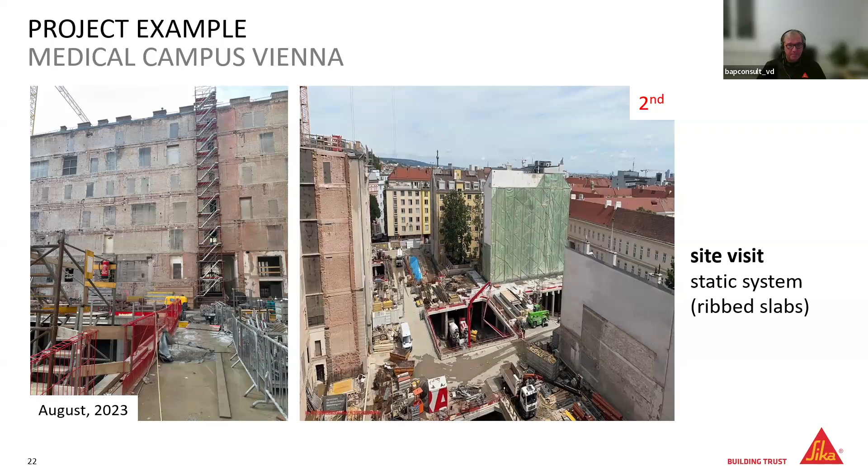This was the medical campus in Vienna, the first step. The second step was a little bit higher, because we had to reinforce, as the static system means, the rib slabs, and this was roughly 2 kilometers of that. You will now see, it was the fifth storey. You see now the rib slab, and the rib slab was made of steel rebars, and then the laminates.

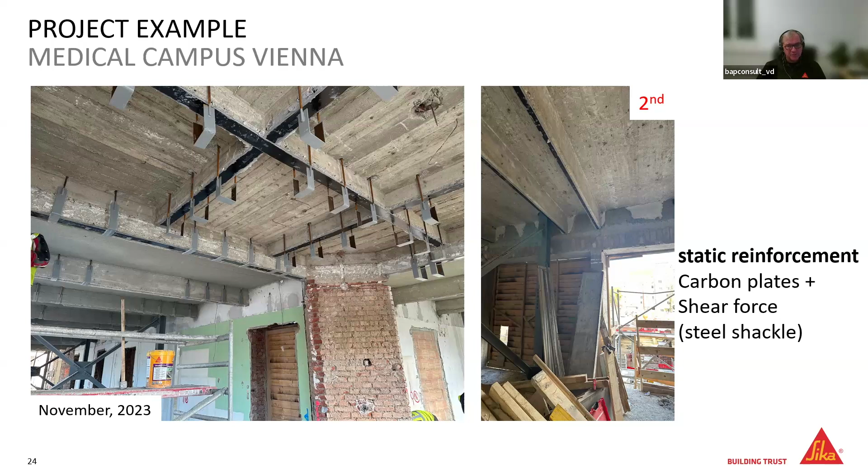The static reinforcement also includes the carbon plates or the CFRP system, and the shear force was done with steel shackles or steel stirrups. You see there was a lot of them, and this is the whole picture. You see there was really a big quantity of the steel shackles or steel stirrups.

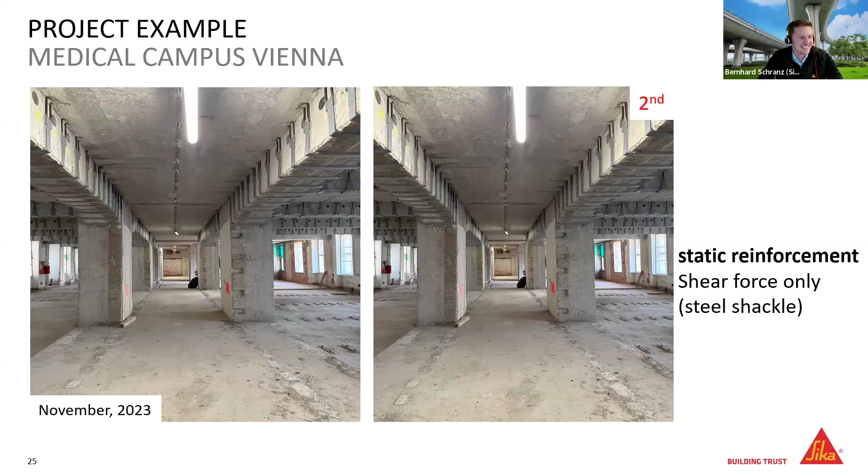This was done in 2023, and nothing more on there. Yeah, that's it, I think. Okay, this was the last picture of the big projects.

Most of the time I did this really well, because I visited all the sites, took the photos, and I'm also a little bit designing this and helping the engineers to apply the laminates, and also helping the workers to apply the laminates in the right, very well functioning way. Thank you very much for this.